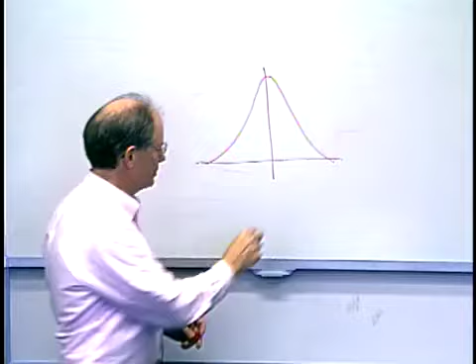Basically it says you will always have an error. It will always be wrong. You'll always be adjusting the process. So it's the concept of a dog chasing its tail. You'll never—how can that possibly make it better? So they just say, don't do it.

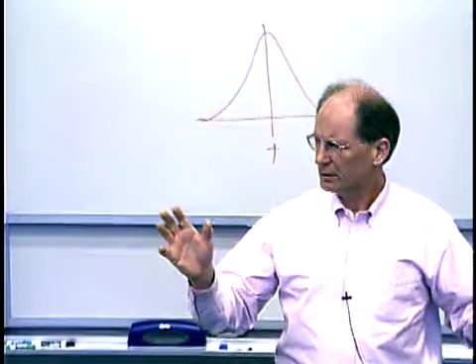And the operators had control over this thing, and they were always looking at things, and they could type in new numbers and change the set points in the plant and that sort of thing. And they all had their idea of how they could make it better.

He had this hypothesis that they were chasing their tail, always adjusting the process. So one day, with the concurrence of management, from the operator's point of view everything was still the same, but they disconnected it, so that the operators were making changes to all the set points in the machines, but nothing was actually changing. And guess what happened?

It got better, the variance went down. And that kind of circumstantial stuff says, okay, it is crazy talk, why should I bother to do that? But there's an important 'but' here: if that's all the information you have, if your idea is just 'based on the error, make an adjustment'...

If you have any schooling in feedback control, you know that just closing the loop is not success. In fact, as I was once chastised by one of my professors, all that closing the loop guarantees is that you can take a nice stable process and eventually make it go unstable. You have to close the loop with knowledge of what's going on and knowledge of what the limits are. In the end, if you're going to have an operator making adjustments to the process based on measurements, they should have some firm basis for that. So that's what this whole thing is about: what is that basis, and how good could it be?

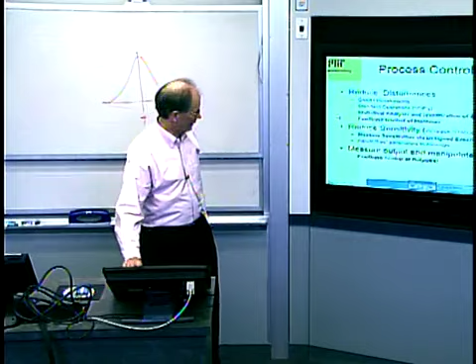So we get to the third level of this process control hierarchy we talked about on day one. The first level is good housekeeping, standard operating procedures, statistical analysis, and identifying whether everything is in a state of stationary statistical control. The second is reducing sensitivity or increasing robustness — that's the whole designed experiments area. Finally, this gets it as good as it can be without active manipulation, and then finally we actively manipulate and see what we do.

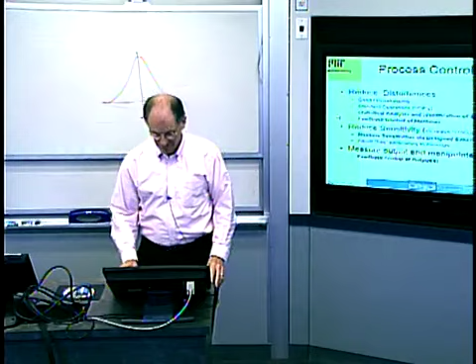So I've come to firmly believe, even though I came to this whole thing from a 'feedback control can solve any problem in the world' point of view, that this is the last thing you do after you've tried these far cheaper, far more robust, and in some ways far more in-depth knowledge-of-the-process approaches.

Okay, so I have to take a moment to just review feedback control. How many of you guys have had a feedback control course?

Okay, that's pretty good. Hayden, you've never had feedback control? Yes. Okay. The TA hasn't had the course — we're in trouble.

We often use this generic feedback control regulator approach, and I want to go through this because I'm going to use a little bit of terminology. This is stuff we've already used in class, but I want to look at it a little differently. So let me just define the terms here. This box right here, that's the process.

That's the manufacturing process — the machine, the material, all that other stuff we talked about. The input to that is something I can change: a temperature, a pressure, a feed, a time, something like that. The output of the process is the output of the process — it's what we care about. Actually, I'm going to put the output of the process over here for the moment.

The key thing is that there are two things that make the process not always do the same thing. In other words, if I hold the inputs the same all the time, the output still varies. We know that from SPC, you know it from data you've taken. So where is that other variation coming from?

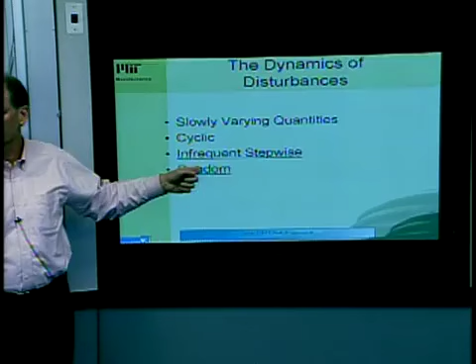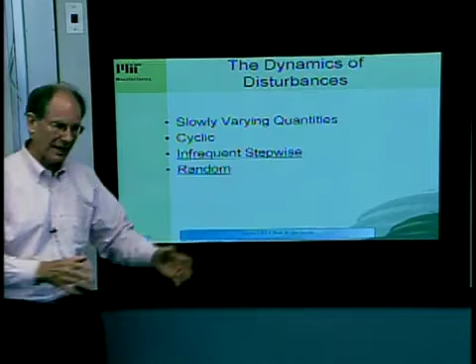So what do we want to look at in trying to understand this? What kind of disturbances do we expect to see, or how do we want to model disturbances? We know that to capture the process, we're going to have to model disturbances as being random. Our whole premise for the statistical models is that the process has some randomness associated with it. Then we have things like unexpected mean shifts, which in control lexicon we call infrequent stepwise changes. We might also have tool wear or degradation of solutions over time - a slowly varying change of the process. And then, of course, cyclic disturbances happening because of shift changes, time of day, and other things like that. It would be nice to deal with all those.

For the moment, we're going to deal primarily with infrequent stepwise random disturbances. There are more advanced topics that will deal with these two, but we won't get into those today. So, cycle-to-cycle control is simply defined as doing the best you can with the situation we have now.

So the ideal thing is to have a full measure of how you're doing on your production. You can always make that measurement after the cycle of production has finished. Think of an injection molding machine as a good model for this, or a metal stamping operation, or a high-speed forging operation — anything where you can't get in there with your gauge while it's happening, unless you're crazy.

And even if you did, it wouldn't tell you what you wanted to know. Like an injection molded part, until it's popped out, in fact until it's cooled off, you don't know how you did.

So it's finally there, you measure it, and then you say, I have to make a change. Can I make a change? Most machines will allow you to make a change somewhere. You did your designed experiments, and the whole idea of that was to find what are the significant inputs to change significantly to have a significant change in the output. So we find out what those significant ones are and try to match them. If the dimension is wrong, you say, okay, here's what I want to adjust to change it.

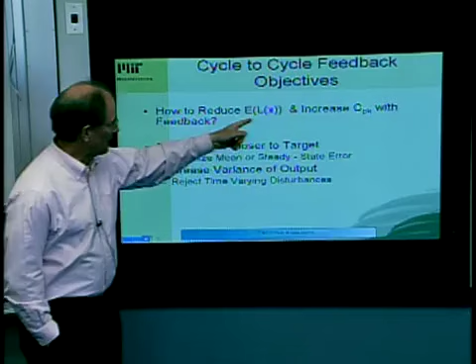So what is it we're really trying to do? Well, to use again the terminology of the class, we would like to reduce the expected loss function, or increase a measure of process capability, with feedback. Ultimately, as I said, if our goal is to go from a target that looks like that, and we have a process that's over here somewhere — whoops, it's not very Gaussian looking.

If we can make the process look more like that, we will have increased our process capability, or decreased our expected loss. And we can think of that, again, with our two major goals: one is to reduce mean shift to zero if possible, and decrease the variance.

Now, this is a bit of... anyway, we're looking to the future of what's going to happen with the results here. What if I have a process that's over here and I'm able to recenter it without reducing the variance? Is that a good thing?

Yeah, okay. What if I have a process over here and all I can do is recenter it? I can recenter it, but at the cost of increasing the variance. Is that a good thing? Well, that sort of depends, right? If I didn't tell you how much I'm going to increase it, if I increase it by a factor of 10, you'd probably say it's no good.

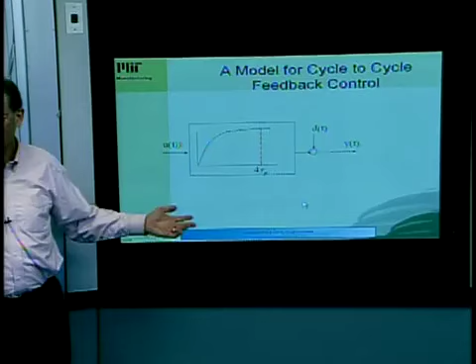Step response? Yeah, this is like a classical, highly simplified example of the simplest dynamic system you can have. In the lexicon of our class, I've made a step change to an input. I've instantaneously changed a pressure, a temperature, a feed, something like that. And what does the output do? Well, in real systems, they don't change instantaneously. They have dynamics, right? The simplest dynamics would be something like this, a simple lag.

This would be a first-order linear system, and it takes 4 time constants to settle out. So there's an important number here, which is what I'll call the process time constant: how long does it take the process to reach steady state after you've made a change to it. That's going to become an important number for us.

And then we have the disturbance, which would be our randomness and that sort of thing. But why do I care about this steady state number? Why do I put this number, 4 times the time constant, there? Given where we're going, we're only going to look at the process after it's done. We're only going to make a change between the processes. I'm only going to look at the output.

Think of it, I'm going to talk about a sampler in just a second. A sampler is a mathematical concept, in effect, based on a delta function that says, here's a continuous number. I'm going to sample it and look at it for an infinitesimally small period of time. So I'm going to do this to the output.

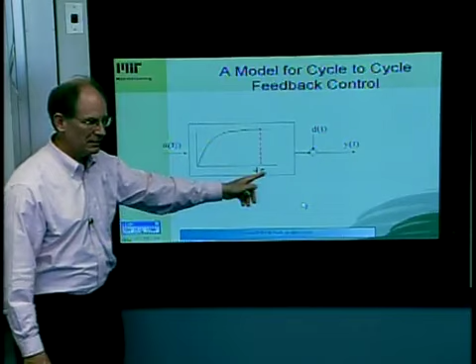So I'm going to make a change, then I'm going to sample the output. When do I want to sample the output? After it's stabilized, okay? So conceptually, if I have a process that has this speed to it, and I make sure I always sample it after it's reached steady state, after a stepwise change, what does the process look like from an input-output point of view?

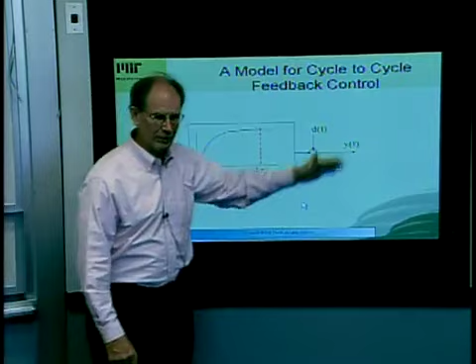Constant input gives me a constant output. I don't see any dynamics, right? I don't see any of this stuff in between. And can you see that then if I looked at a lot of different inputs, let them all go to steady state, let the output all go to steady state, looks at all the sample ones, I basically have a bunch of inputs, a bunch of outputs, and what would be the simplest relationship between those two?

You just did your designed experiments. What's the simplest relationship that you could have between a single input and a single output? Yeah, straight line, linear fit. And that's a great first place for us to start with this model.

So the nice thing is with this cycle-to-cycle control, I can take a process that could be, in fact, a lot more complicated than this and just reduce it down to, I hope it's my next slide. I hope this thing will work.

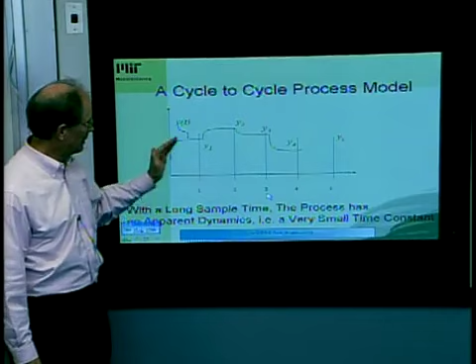I'm going to skip through all this. This diagram says that what's in fact may be happening with the process is that I make a change at a particular time. It comes up to steady state, but I sample it here, here, here, and here. And all that mess in between I'm unaware of, I don't care about. And what I can do now is reduce the whole process down to a single number.

And I don't even have to worry. The nice thing is, I don't need to go into this right now. I don't even need to worry about the offset. You know, you think of a straight line fit, you've got the slope and the offset. In the approach that we take here with cycle to cycle, I don't even care about the offset. And run by run they do, but it turns out it comes out in the wash anyway.

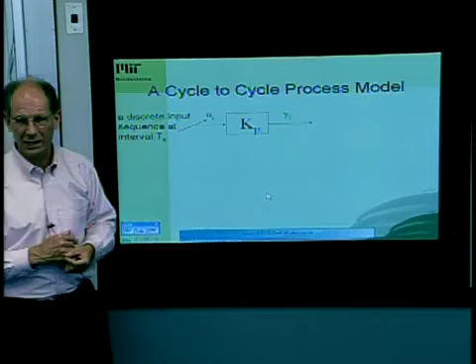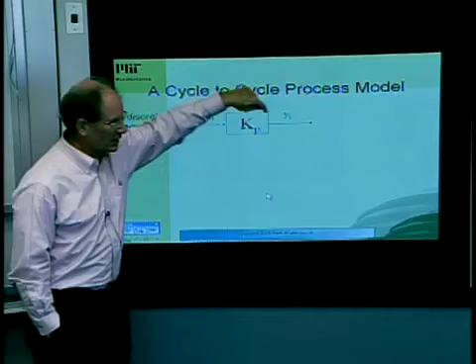So now, all I need to know about the process is an input-output relationship, but it's discrete. It's between a discrete input at an instant in time and a discrete output. So that is a valid model of our process now.

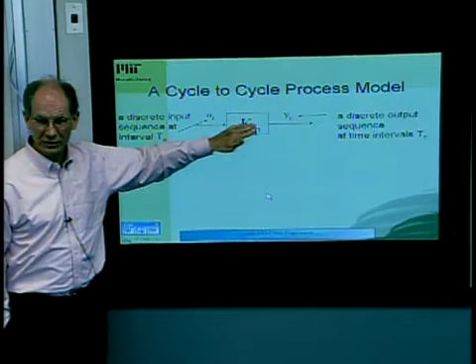The only thing that's questionable is what's this number, and is it a constant? In other words, if I run the process today, is it one number, is it another number? And of course, as you know, we would do a test for linearity, or maybe it would be better modeled as quadratic and other stuff like that. Without going into it, and again invoking the linearization properties of a good control system, it doesn't matter. As long as we have a pretty good estimate of it, and as long as it's not rapidly changing, we're okay.

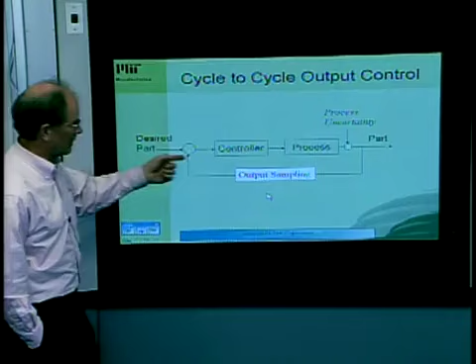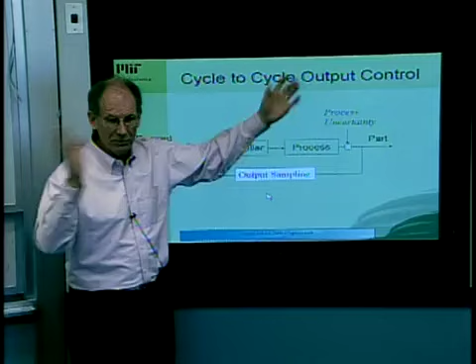Okay, so here's ultimately our model. We have the process, and we have some process uncertainty, which we'll bring in as a purely additive number, because the model I just showed you was a deterministic model. There was no randomness in it, so it obviously doesn't capture what we care about. I'm going to sample that output, compare it to what I want, and that'll be my cycle controller.

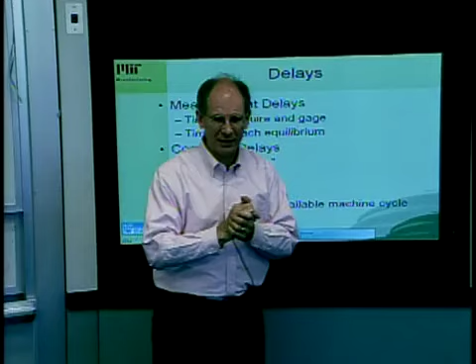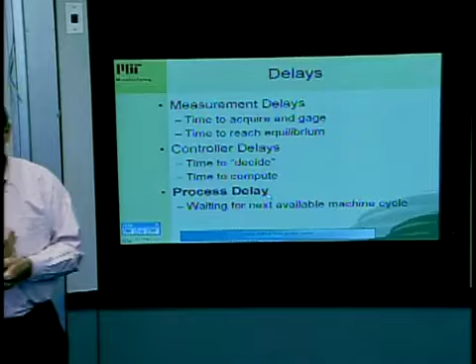Now, when you get into discrete control systems, one of the things you can easily model is the idea of a pure delay. If something happens on a given cycle and I don't do anything until the next cycle, I can have the concept of a pure delay. Something happens here, but there's no reaction until here, or here, or here. The theory of discrete control systems allows you to deal with delays very nicely.

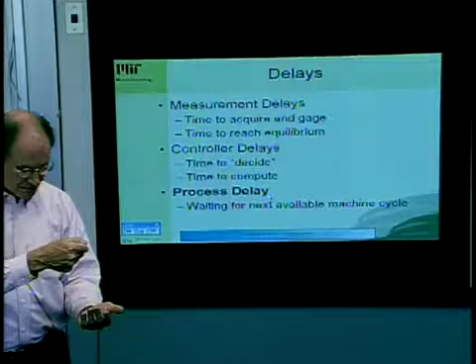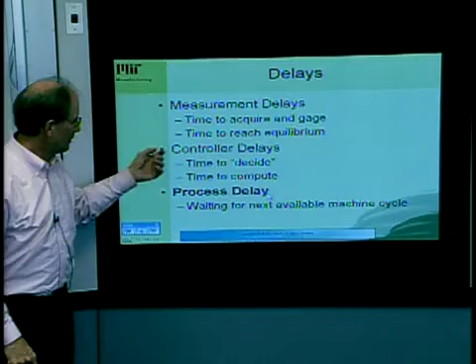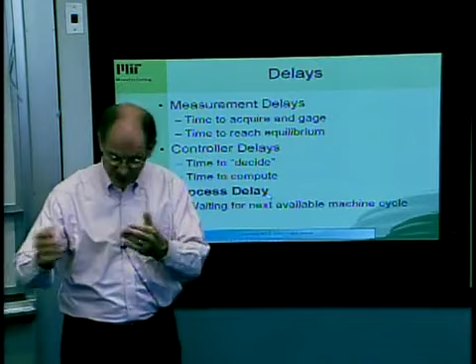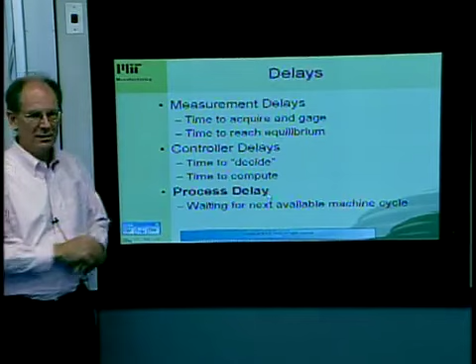We have three kinds of delays in any control system, and certainly here. One is a measurement delay—part comes off, it takes me some time to measure it. Because of that measurement delay, there's no way I can make an adjustment before the next cycle, so I already have a delay based on that. There's controller delay—even with fast computers that can be made very small, it still takes some time, and if it's an operator doing some pencil work on a pad, there's a delay associated with that. And then there's a process delay: when can I make the machine? When is the machine next available to be changed? So given all three of these, what do you think the correct model of delay is for this approach to process control?

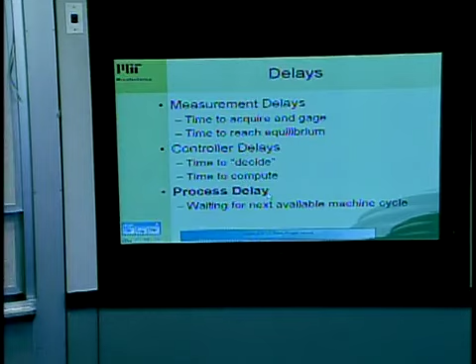Let me preface this with one other comment. We have a basic unit of time here now. What's the shortest time, other than zero—the shortest time interval that's possible in this approach to feedback control? The fastest I can do something is one cycle, right? Because nothing exists between cycles. When something happens, the next chance I have to do something is a cycle later. So this is all kind of time independent in terms of real time; it's just based on the cycle time of the process.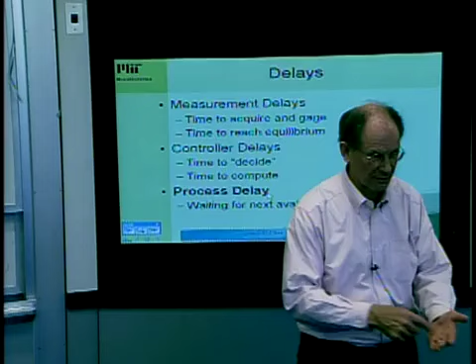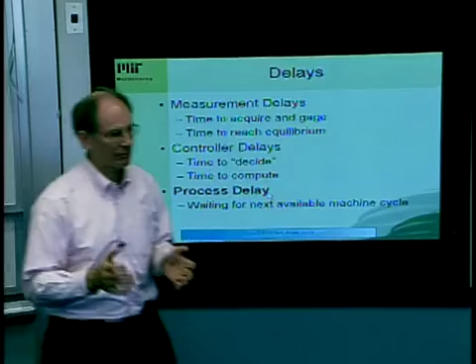Given this, go back to that other question. There are delays involved in all discrete control systems, and there are delays in this one. How do you think we should model the delays of a manufacturing process for cycle-to-cycle control? Here's a thought experiment: run the injection molding machine, put the part on the bench, measure the part, figure out the next control cycle based on the algorithm, adjust the machine, push the button, run the machine again. That's the delay structure—how would you model that delay? Or how many delays, how many machine cycles, do I need to delay the process?

Minimum? One? A half? A tenth? Ten? I know I'm not making myself clear here—I can see that. Richard?

The discrete points of time where you're actually modeling the process are probably right when your part comes out, so you should probably have a delay of one cycle. Exactly. If I can measure quickly, make a decision quickly, and be ready to adjust the machine before it's time to push the button, then I've built in a one cycle delay. The best I could ever do—and this is how you capture it in the theory—the whole idea of cycle-to-cycle control is: I make a measurement, and the next chance I have to intervene on the process is one cycle later. So you build in a one cycle delay.

Okay, why does this make a big difference? Well, in discrete time control theory, the whole concept of a delay operator is the basis for it. Now, if you dig into your deep, dark past on control system theory, you may remember something called the Laplace transform, the Laplace operator, and all that other business, which was a way of algebraically describing differential equations in time.

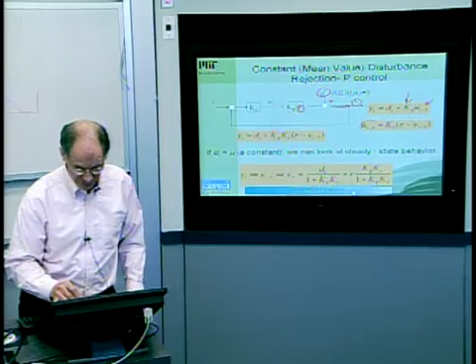Then we solve backwards here. We say, okay, this value right here, the input to that, happens to be equal to the controller gain times the difference of the reference and our feedback. Put it all together, and this is the equation for the output of the controller.

And then here's the important thing. If I now say, all right, I'm going to make the input, my command — think of it as a dimension or something for what we're doing here — a constant value, 10 inches, never going to change. For the moment, let's say that the disturbance is not random, it's just a constant value. I'm going to use the term mu, but it's a constant value.

If I put that into this equation and solve for y sub I, and let time go forever so it's now steady state, if you go through the algebra, what you get is that the steady state value of the output is equal to these two quantities right here. It's the disturbance divided by this quantity, and it's the reference multiplied by that quantity. Okay, big deal. But here's the big deal.

Here's the output value in steady state, here's the disturbance. What do I want that quantity to be if this is a good control system? For the moment, imagine that my reference is 0 — conceptually that's an important thing. So the ideal output of the process is 0. Now this says that the ratio of the output in steady state to the disturbance, which is finite, some constant value, is this quantity. What would I like this quantity to be?

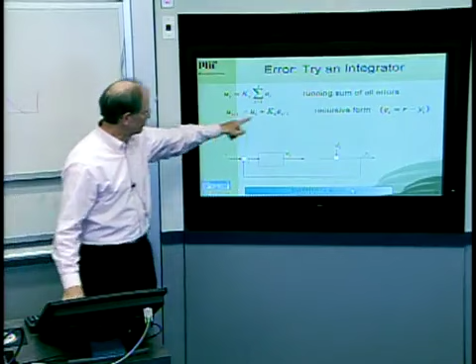So this is my new controller. It says the output at any time, how I'm going to change the machine, is the sum of all the prior errors. Now I can turn this into a recursive form: the next output is the prior output plus the next error. Then I do the Z-transform on it.

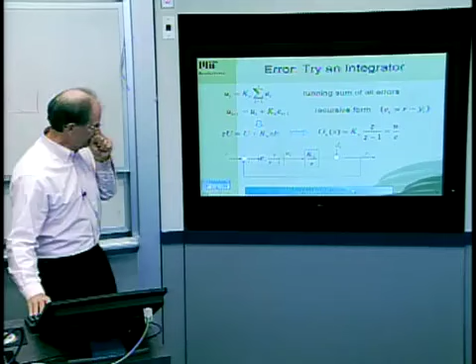It comes out like this, and this is where it gets useful. Now my controller, instead of being a simple gain, looks like this: Z over Z minus 1, which describes this equation. And I can do the algebra of this and see what happens.

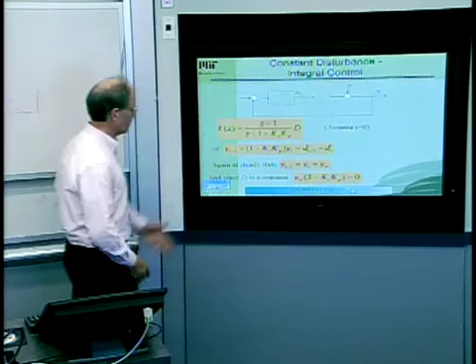I follow the same block diagram algebra, and the nice thing is that Z is simply a multiplier, so I can treat it like any other quantity. If I do that and go through all this, these Z's cancel out, and I write the equation for the disturbance. I'm assuming R is equal to 0, so this is 0 over here. Going through the block diagram algebra gets us down to here.

Now a couple things are interesting. At steady state, we know all the y's in the system are the same—everything's settled out. And because this disturbance is a constant, these two things are the same: the disturbance at time 20,000 and time 20,000 plus 1 are equal since it's constant. When you come down here, you find this quantity equals 0, regardless of the loop gain. It doesn't matter what value I pick for Kc.

It's always 0. So it's just a way of showing that with a simple integral controller, I can indeed take a finite constant disturbance and completely eliminate it in steady state—not instantaneously, but in steady state.

So now here's the problem. Since Kc, my controller gain, doesn't matter for that, it must matter for something else, right? So what value do I pick for that gain of Kc? What's the effect of the value of this controller gain on the performance of this system? Do you remember from control theory what the effect of a controller gain is typically—low gain, high gain, middle gain, too high, too low? Generally what happens as you adjust the controller gain?

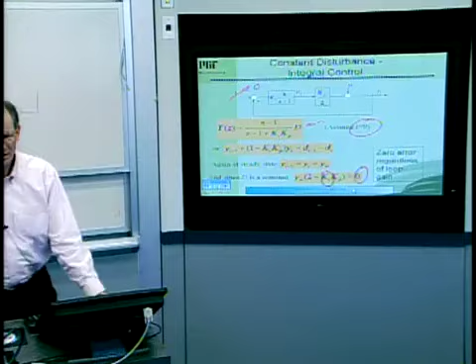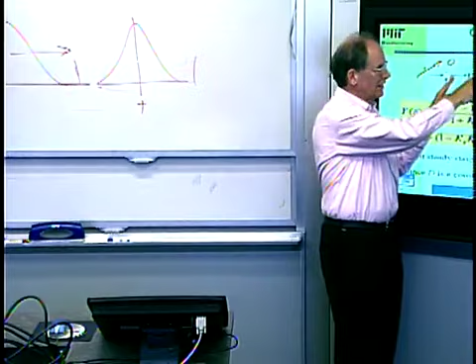Think of it this way: this controller gain says how much I'm going to adjust the system based on the error. If I'm very conservative and Kc is really small, and I get a modest error, I'm going to make a really modest, timid change—it's a measure of timidity, I guess. If I'm bold and trusting my control system, small error but large gain, I make a huge change, and that's going to get the system moving faster. So conceptually, high gains will generally lead to faster system response, and low gains will lead to slower system response.

Which ones do you think are typically, but not always, the most dangerous with respect to instability—high gains or low gains? High gains, of course. Because imagine tiny gain, tiny error—you're almost there. Huge gain, you whack the system with a big change, it goes way past where you wanted, and now you've got a large error, and it keeps coming back and forth. Next thing you know, you've got a system that's unstable.

To understand this, you have to understand discrete time control theory. There are wonderful books and courses on that, but we don't have time for that here. We'll do it heuristically, just for this system. Here's what happens.

I'm going to step through different gains. I already knew the theory behind this and what these numbers needed to be, but here's what you get. What I'm going to show you is the product of these two gains, because you can collapse these blocks together, and it's just this product, KC times KP, that matters. So the so-called loop gain.

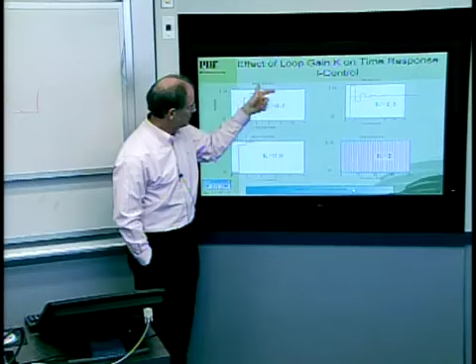If I use a loop gain of a half, here's what happens. If I make a step change in the input, it goes 1, 2, 3, 4, 5, 6, 7, maybe 8 cycles later, it has reached the final value, and the error is 0.

Just as I expected. Okay, that's good. What happens if I increase the gain? Should get better. Well, indeed it does. If I increase the gain to 9/10, 1, 2, maybe 3 cycles, it's done. And you notice here, this is really emphasizing the discrete control aspect of it. There's a change, and then who knows? And then another change, and then who knows? So 9/10 is good.

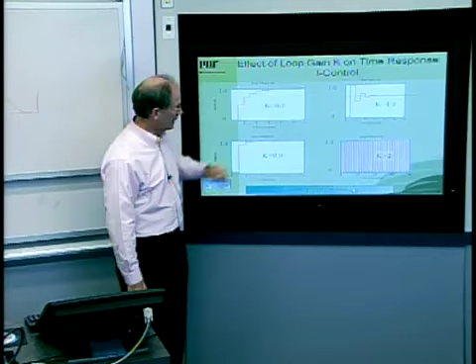9/10 is good. Then 1.5 should be good, 15/10 should be good. So I go to 15/10, and what happens? Well, it now takes 2 things. It took 3 cycles to settle here. Now we're back out to taking 8 cycles to settle, and I got this oscillation. So it seems like I was getting better, and now I'm getting worse.

Just to see what happens, since this is simulation, let's set the loop gain equal to 2, and what happens? The system indeed is now what we call marginally stable, and I don't have it on here, but if I set it to 2.001, it starts to diverge.

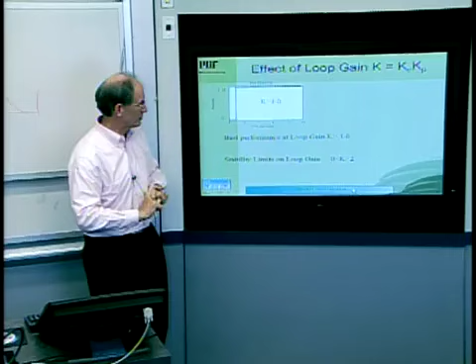Okay, here's the cool thing. If I set that equal to 1, how long does it take to get to the correct value? 1 time step. And this is actually a pretty well-known concept in discrete time control systems, that if you can magically find exactly the right gain, so that the loop gain is equal to 1, you indeed can get exactly there in 1 time step.

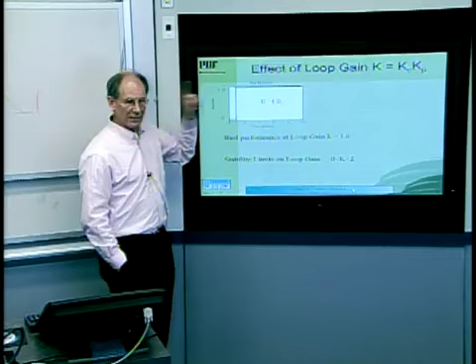So this is our goal. It says that the best control system I could have now would take a mean offset like this and take it to 0 error in 1 time step. So this is probably the right controller for us to use.

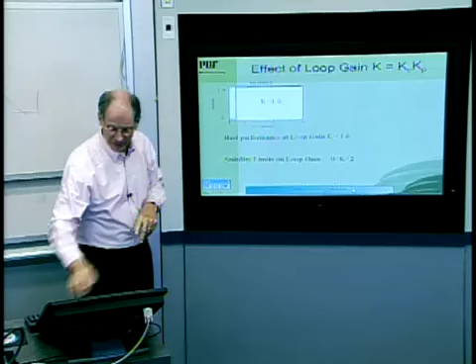Okay, it also tells us that if I'm too aggressive and I use a loop gain of 2, think of the operators now at this cement plant that I was talking about, and they were turning the knob a little bit too far, and so they were maybe here or here and making things worse. Or they were here and they were being too timid and it really didn't have any effect over the time frame that they were talking about.

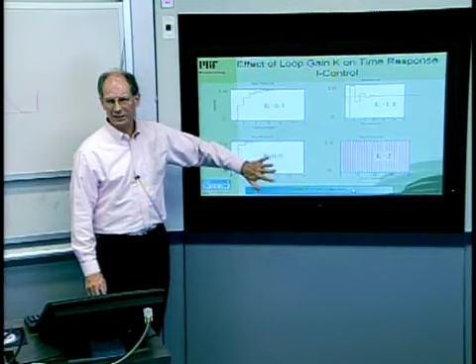If you knew what your process gains were and you knew where to set this, you could always guarantee that you got the maximum effect in the minimum amount of time. And the other thing is the operators were not using this control algorithm, they were using that control algorithm. So it would never get to 0 error.

So, with a fairly large gap in coverage here, what I'm purporting to show you is that if I have an output, a process whose output looks like this, and I apply this simple discrete time controller, which means I measure, adjust, but adjust according to this algorithm here.

This is something I think is important, which basically says, okay, I'm the operator, I have to make an adjustment to the process. Here's the adjustment I'm going to make. And the adjustment I'm going to make is whatever it was the last time, plus this controller gain, which you're going to tell me what it is, times the current error. A little bit different than what it might have been otherwise.

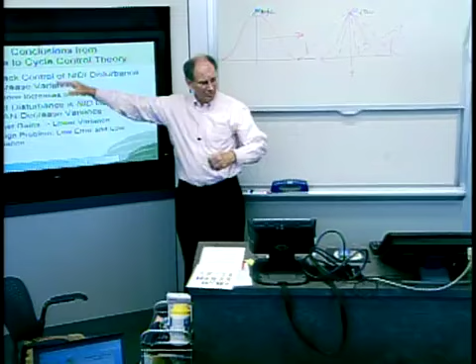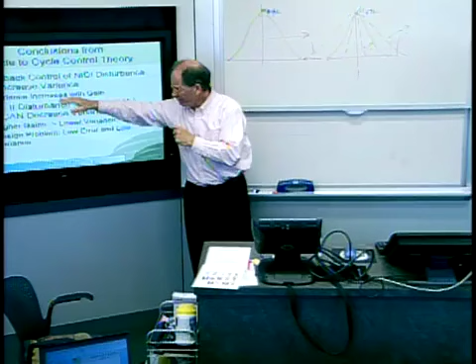So the cool thing is we end up with this continuum: for a totally uncorrelated process, here's what's going to happen—mean shift, variance increase. If we start to have some correlation in the process, and some memory, some reason the disturbance is occurring, we can start to actually get both.

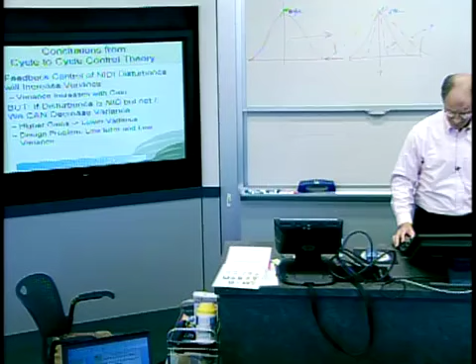So who believes this? It's just simulation, it's just math. Who believes it? Come on, abstention's not allowed. Believers? I don't believe in bending and injection molding, but other than that—believers? Agnostics? Okay, obviously it must work. I wouldn't say this, but George Sue, a good part of his thesis was to say that the theory, in the end, if you'd already had the background, isn't that extensive. And it does seem too good to be true.

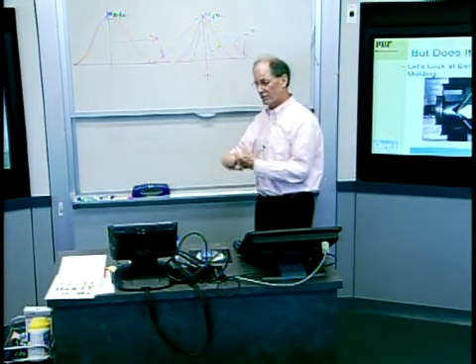So we said let's do an experiment, and let's try to find two extremes. Let's find something we think has the least amount of correlation and something that has reasonable correlation. Let's also find something quick and easy to do in the lab that we have. So we decided not to do semiconductors—we decided to do bending and injection molding.

George set up this experiment, which those of you at Singapore will recognize, because you've done this in your summer experiments—it's an experiment we used to do in this class. You take a simple strip of sheet metal and you bend it. The input is the depth of the punch, the output is the angle. Pretty simple. And we're going to do injection molding too.

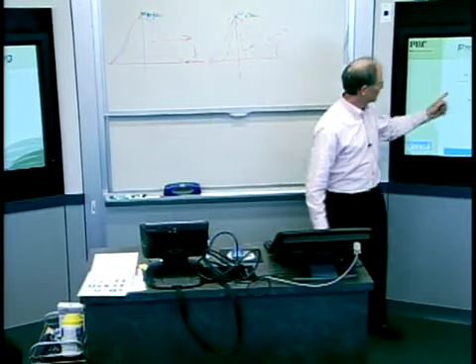This is in George's thesis. Here's the process model for bending—pretty simple, right? The input is the displacement of the punch, the output is the angle. George did a number of tests; he put in different punch depths and measured different angles. Shouldn't be this straight, but he got some good results.

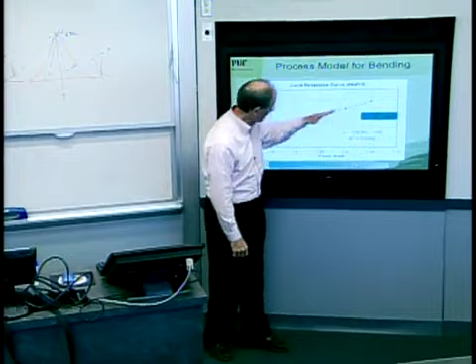So he came up with this number for a particular value of steel. Now keep in mind, this number will change immediately if I put different thickness material in, or a different composition material, because it depends on yield strengths and stiffnesses and that sort of thing. But he got a nice number for this—all he needed from that was the slope. Now with that slope, he could tune the loop gain to be somewhere around where we wanted it to be.

So he implemented that, and this data is a little bit weird because we hadn't, at this point, done all the theory and realized there was only one true controller. So none of these are actually for the best controller case. Here's for a controller that is proportional, no integral control, and has a gain of 0.7.

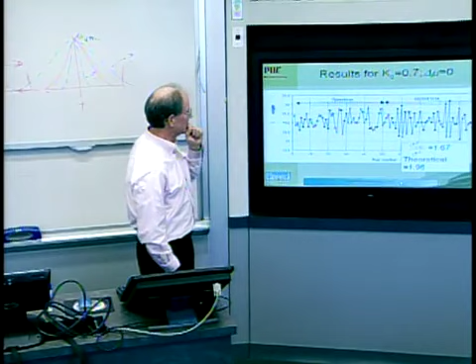And what we wanted to look at was the variance ratio only. Here's the data beforehand, here's the data afterward, and our variance did go up, roughly equal to what we expected to see. That's not one of the good ones.

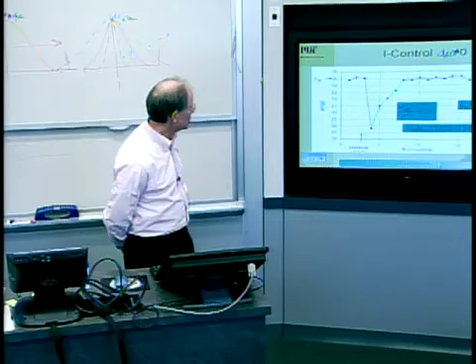Here was one of the cooler things we did. This is now where we did integral control, and we put in a disturbance, but the disturbance was not a mean shift. What we did is we took material of exactly the same thickness—I think that's what we did here.

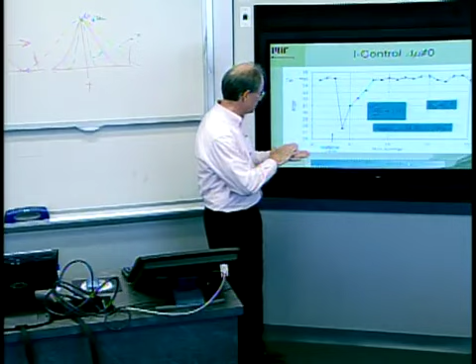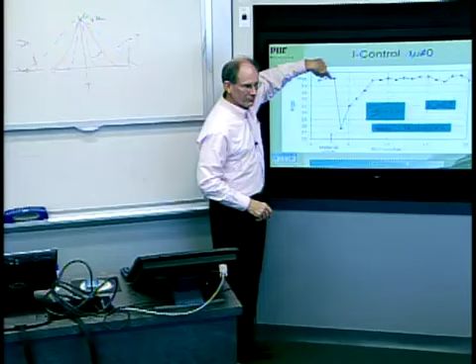We did material of exactly the same thickness, but a different material—I think we put in aluminum instead of steel. So now the gain is wrong, and obviously the first time, everything's fine. The target is 35 degrees, and George slips in a different material, so immediately the angle goes right down because he's using the setting from the prior cycle. Now we've got this huge error.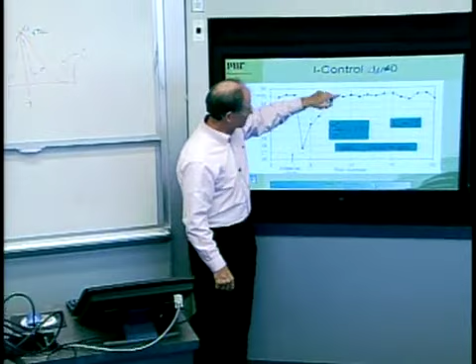But what happens by following the algorithm, in 1, 2, 3, 4 time steps, it's back right on the money where it should be. Now he was using a gain that was too low, so this took a long time to come back up, and the variance ratio is a little bit lower than we would have expected.

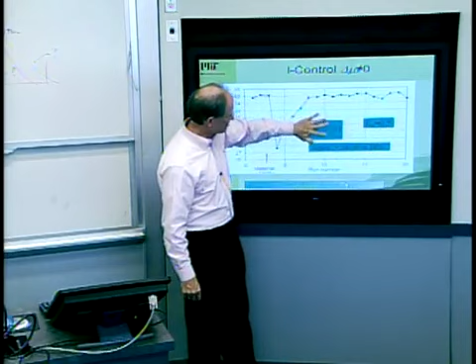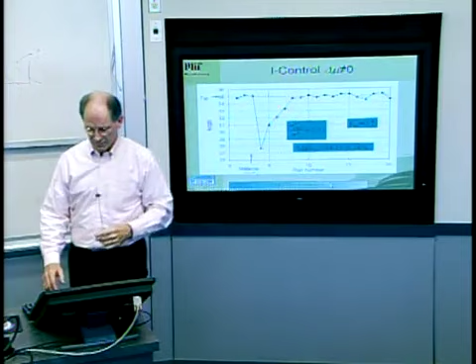But this is another value for this controller that I wanted to point out, and why using higher gains is important. If something like that came along, different material or significant changes in the material, this automatically, with no intervention on anybody's part, not even pulling the andon cord or having to do a statistically significant number of measurements, just gets you back on track. It's a classic example of the strength of disturbance response for controllers.

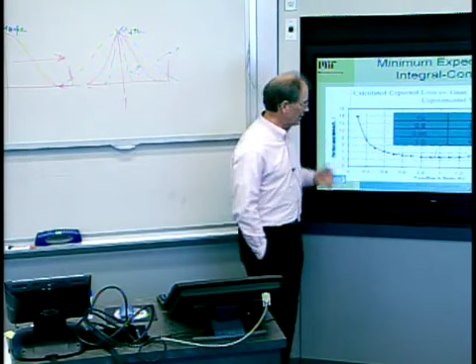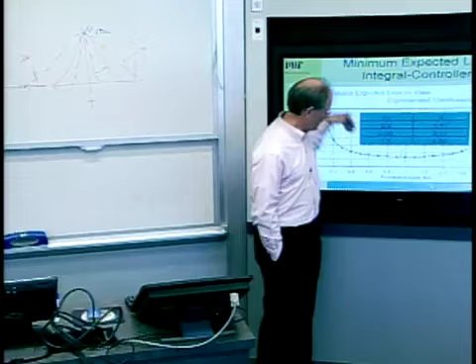Now, sort of a compilation of everything that George did over all of the experiments with the integral controllers: for the bending, he said, let's take a look at this quantity V, which was the expected quality loss. He plotted it as a function of the gain, and indeed it goes through a minimum right at the gain of 1, and then goes back up. So that was a pretty good result.

And it showed that, indeed, from no gain at all, where the variance was very high and the offsets could be very high, we did a lot better.

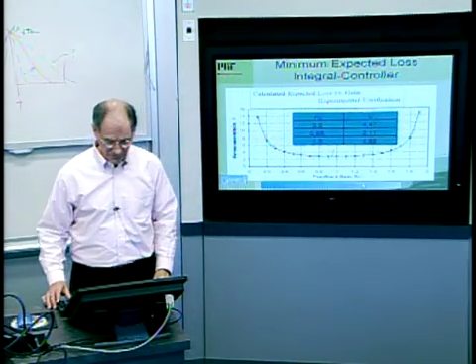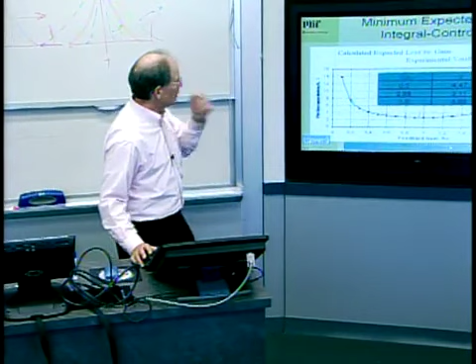Was that curve from experiments? Yes—wait a second. Actually, no, you're right, I'm sorry. This was calculated, this was not from experiments. But it suggested again that Kc should be 1. Ah, yes, I'm sorry. So then he did this experiment.

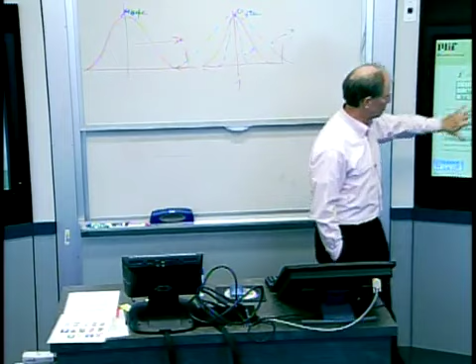Okay, so now let's go to injection molding. Well, that got more complicated right away, because the first thing you find out with injection molding is you're not sure which variables matter, you're not sure what the process gain is. So we had to do a full DOE on the thing, do a significance test, and find out what was important. What he ended up with through the ANOVA analysis and some other stuff was that hold time, for his particular problem, was the most important. He was molding rings, simple test rings.

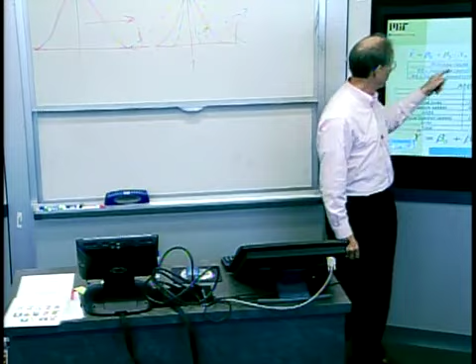So we came up with a model that looked like this, and again, that term didn't matter, but it was a constant times x2, which was the hold time. This is the reduced one—he started with a lot more variables to start with.

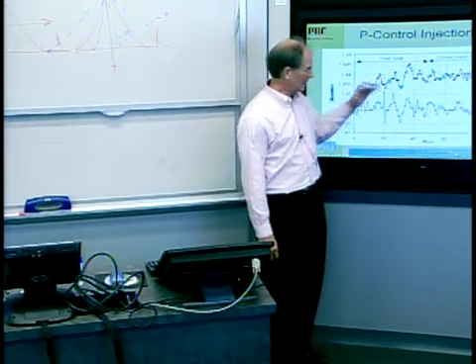So here's proportional control, again one that we later abandoned, but it gives you a nice example of a bunch of things. Here's open loop—he's making these parts and noticing they're all over the place, and they're kind of drifting, not even steady. Then he turns on the controller with a closed loop gain of 0.5, and the mean value is not correct, but it's constant. So it's completely eliminating these shifts that were going on, and the effect is quite dramatic.

But let's go on to something—oh, and the other thing that's really cool is that the variance ratio was like 1/4. You can see here that this is kind of all over the place, and now it's greatly reduced.

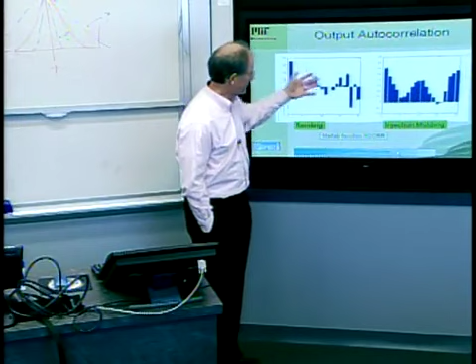You can actually measure the correlation of these two processes by just running it through a correlation filter. This doesn't tell you just by looking at it—you use a MATLAB function—but this basically means that bending was indeed uncorrelated and injection molding had some correlation. There's a little bit of correlation in the bending because the variance comes from coupons that were cut from the same sheet of sheet metal and that sort of thing.

That's cool too, that's basically more of the same thing. Here's the one I wanted to show you: injection molding integral control. It just zooms right in.

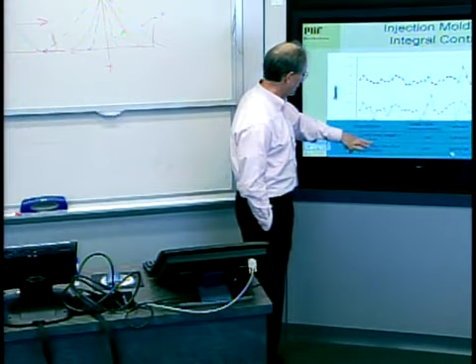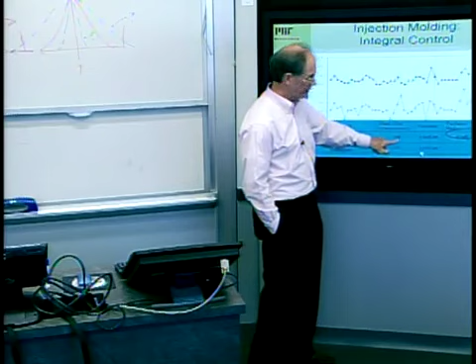The desired value was 1.436. It just pops you right onto that. I guess the measurements have some error in, but this is in inches, 1.438, and a variance ratio of 0.4. So this is the one example from his data of implementing what we consider the ideal controller. And it simply put, it does what we expected it to do.

So from these model predictions and the assumptions that we make, the argument is that we can do this discrete time control stuff, that discrete time control theory will well fit what's going on. And you get this condition where you will always center this, and you will get varying degrees of either amplification or attenuation of the variance.

But the thing I want to emphasize is that this is hardcore feedback control. But the way it could be implemented is simply to have a pad of paper that says, if you measure this error, do the following thing. If you measure that error, do the following thing, and you will get these results. So it's highly implementable. It could be automated as well, but it's highly implementable.

And as I understand in the semiconductor field, run by run, my sense was that when it first came out, everybody said, yeah, that's great, but we don't need it. And now as basically the needs here and the criticality of the mean shifts have gotten tighter and tighter, they're saying, ooh geez, we do need this. And it's starting to be used. Is that correct, Wayne? Yep.

Yeah, because I think we talked about this earlier in the term, this whole issue: when you get to process capability, if the state of the art is, here's the process, and here's the process capability window, show me the problem you have. You know, there's no problem.